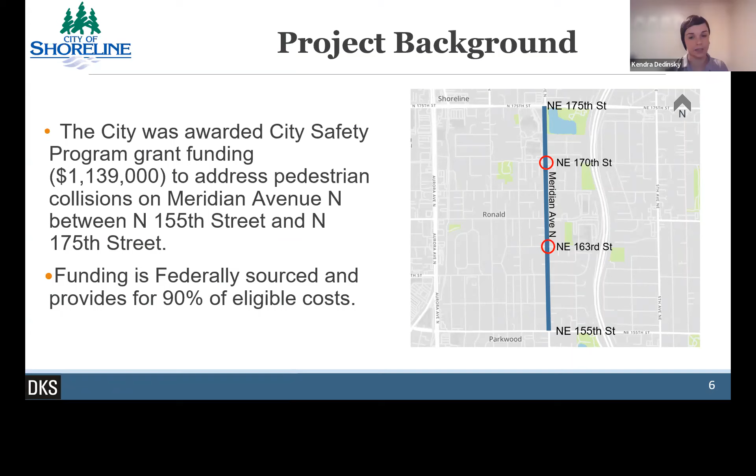All righty, thanks. The Washington City Safety Grant is the premise of this project, and it funds projects based on collision history and a city's proposal of using proven safety countermeasures to address collision history. There were pedestrian collisions in the time frame for this grant at 163rd and at 170th. So the city's grant proposal included a number of measures to improve pedestrian safety, including crossing improvements specifically at these

2 intersections. There's also been a bicycle collision in this segment of the corridor, and the corridor's long-term plan includes bike facilities, as well as a turn lane to address growing traffic volumes. As such, the project proposal also includes bike lanes and turn lanes at strategic locations for compatibility with long-range plans. Next slide.

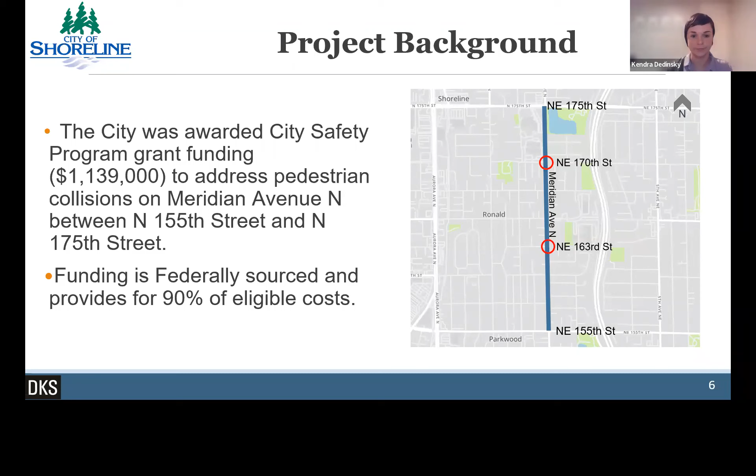As I just talked about on the last slide, based on collision history, the main goal of this grant is to improve safety, particularly for pedestrians. This will be done by improving crossings, including pedestrian-activated flashing beacons, curb bulb outs, which I'll talk about in a minute, so don't be confused by that term, but those reduce crossing distances, parking restrictions near intersections to improve sight lines, bike lanes, and strategic turn lanes, which can also help to reduce angle and rear-end collisions.

The project is not rebuilding sidewalks for the most part, with the exception of bringing curb ramps at the 2 crossing improvements up to ADA standards; ADA is accessibility for mobility impaired users. So the project will not be impacting trees or adding a bunch of new pavement necessarily, but will be better organizing movements for each mode of travel and reducing exposure for the most vulnerable roadway users.

It's important to understand that this is a grant project, and because of that, our scope and budget are generally limited to these improvements. We're not going to be able to really expand scope beyond what we're showing here today, nor can we really do work outside of the project boundaries. Next slide.

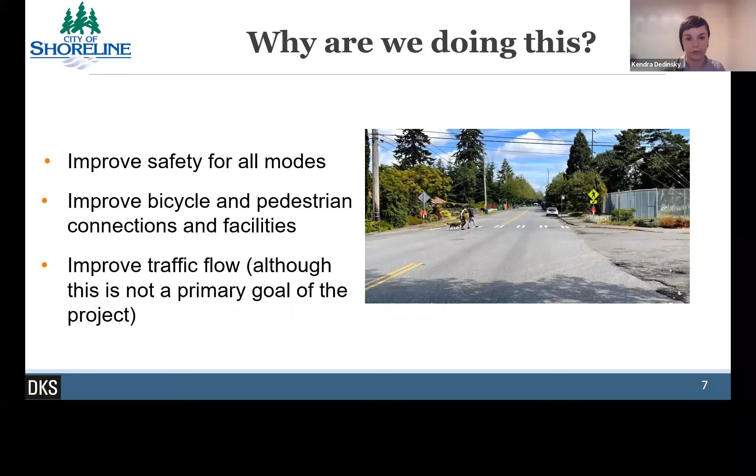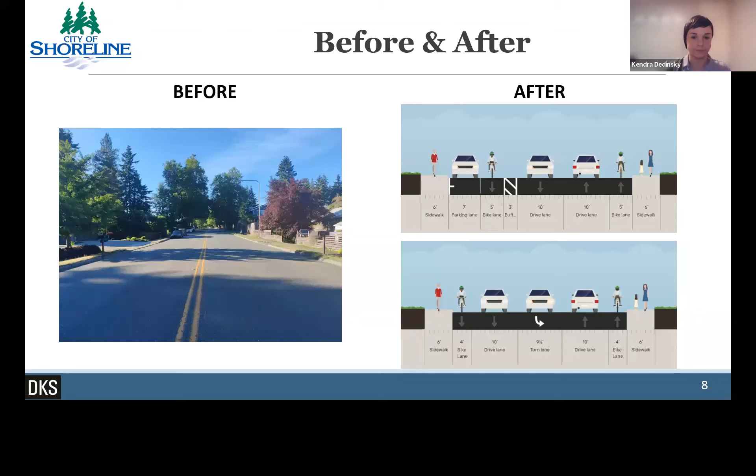Part of the public outreach process, which Veronica's going to talk about a little bit later, is really seeking your feedback on the application of these 2 cross sections and options as to what area they apply in. We specifically asked for feedback so far on the intersection of 167th, and so far we've heard a preference for the inclusion of turn lanes and removing the parking. But again, Veronica will talk a little bit more about how to provide feedback a bit later. Okay. Moving on to the next slide.

I do want to mention that we conducted a parking survey prior to the project development. And although some on-street parking certainly occurs throughout the corridor, it is generally not heavily utilized, and the proposed plan should work to accommodate the on-street parking demand today. Additionally, feedback so far has indicated an interest in some parking removal, given some challenges in terms of sightline concerns at the intersections and making turns to and from those side streets. And then generally speaking too, for the crossings, we want to maintain those sight distance lines to and from crossing pedestrians at intersections.

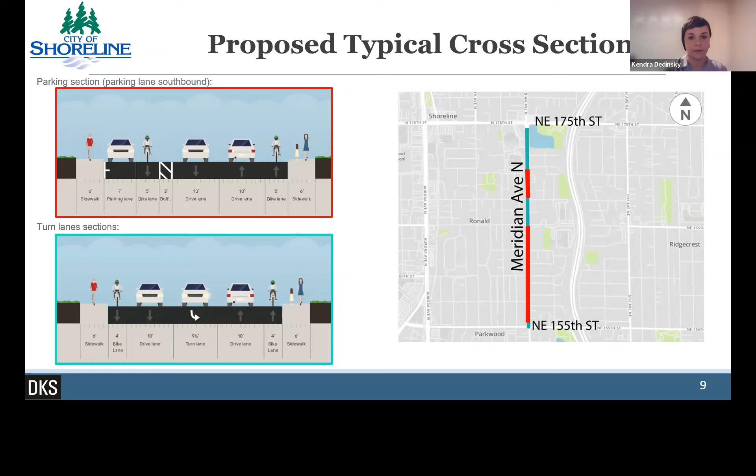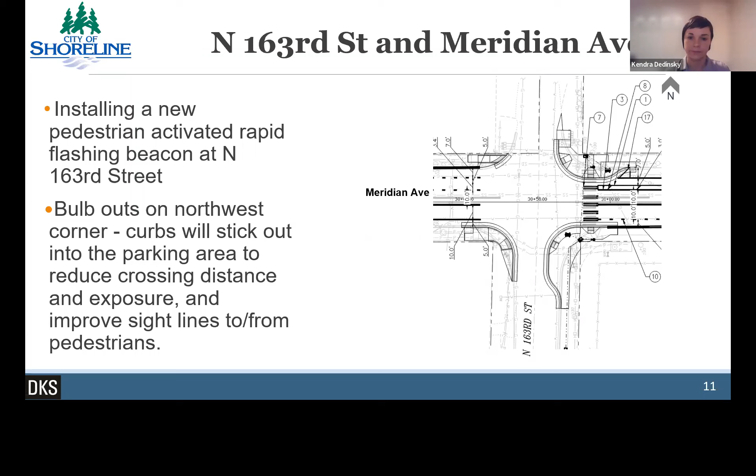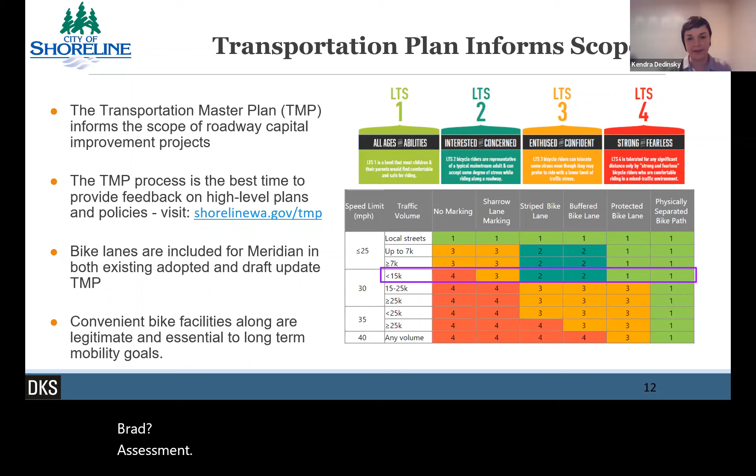But the transportation master plan really sets the overarching modal plans, which is to say the sidewalk plan, the bike plan, the vehicle plan, also transit and freight, which guides capital project design, scope, and investment for really the next 20 years or so. It also sets policies for how we prioritize various modal goals. So for example, our complete streets policy and other supportive policies within both the existing and adopted TMP and the draft version intend for bikes to be accommodated on most streets in some way.

So we often receive comments about how biking along arterials like Meridian is not safe or appropriate and should instead be accommodated on side streets. I want to just note that while it may be uncomfortable to bike on some arterials right now, our city's goal is really to make bicycling reasonably comfortable on almost every street citywide.

Arterials are the backbone of our transportation network, and it's where a lot of the action is, like bus stops, schools, parks, retail destinations, and all of those are places that cyclists are trying to get to and from too. So they really do form a convenient and important network for that access, rather than diverting those trips off corridor. So the draft criteria for how we are planning to approach this need for bicyclists to be comfortable on all roads is called bike level of traffic stress, and it's a notion that's being adopted by multiple cities, region-wide and really nationwide.

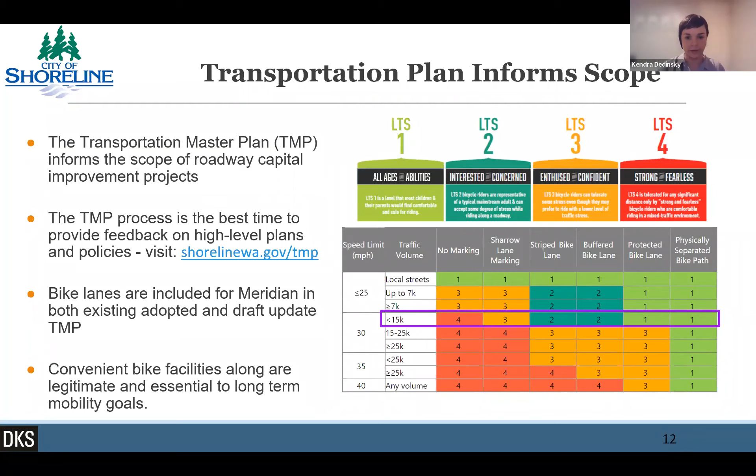Okay, this is the last slide of me rambling on, and then I'll pass it off to somebody else. But I just want to reiterate that this is a grant project. It's fairly confined in its scope. The grants for the Highway Safety Improvement Program, now coined City Safety Program, are relatively modest. Generally, grants in this $1 million range are typical, and anything beyond that tends to move into something that is not covered under this grant. So I'm just reiterating that we can't fund or address every concern, particularly not beyond the project's immediate boundaries.

And I also just want to make sure that everybody understands we're not trying to widen the pavement. The sidewalks are not changing significantly. And as such, there's really not a big impact to trees or other environmental concerns in that regard. We're really keeping this tightened to the roadway and focused on pedestrian, bicyclist, and really vehicle safety as well. With that, I'm going to hand it over. All right, thanks, Kendra.

So just a very high level schedule of where we're at. Currently, we just completed 60% design, so that's actually under review at the city right now. That's been under development this summer, and we'll be sending that back to the consultant to move on towards final completion. So if everything goes according to plan, this winter we would have a package ready for contractors to bid on, and next summer we could be actually building the project. So it's pretty exciting to move forward. It's been a pretty rapid project, but I think it'll be a good one. It's one that I'm excited about.

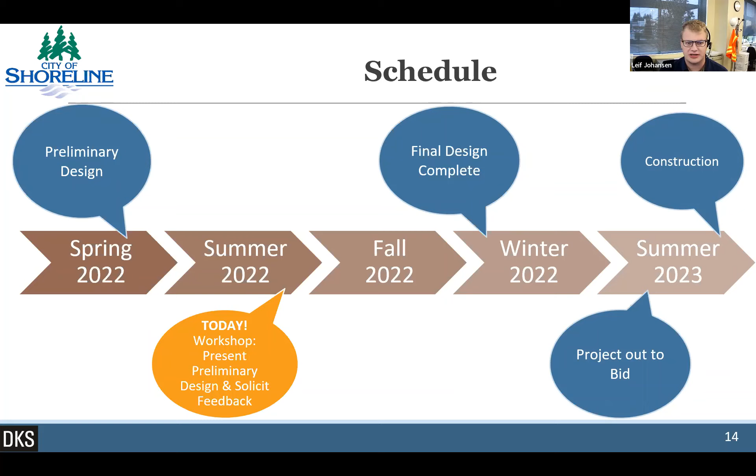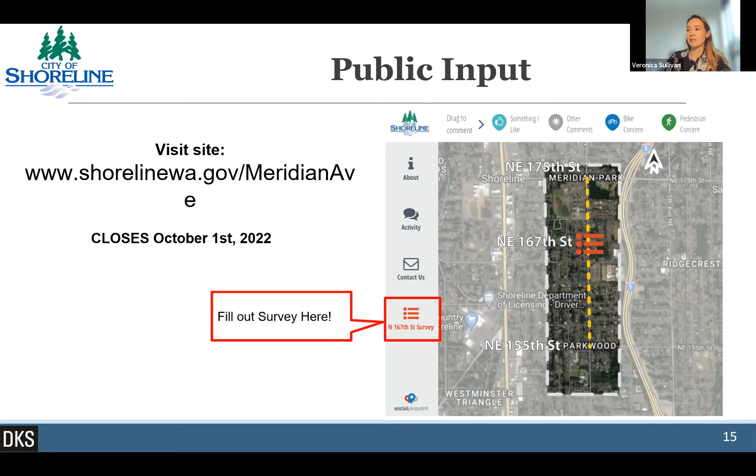All right, now I get the fun task to show you about the public input. So I'm going to put something in the chat box. It's called the Shoreline Meridian Ave project website. So if everybody wants to try and put that into their Chrome or internet, you'll see that in the Meridian Ave safety improvements, there's a link at the very top to Social

Pinpoint. The project overview shows an overview of what is going to be included; the project area is between 175th and 155th Street. You can see the background information, you can see the proposed schedule, hoping everything goes well and we don't hit another pandemic. But if everything goes well, hoping that next summer we'll have it constructed or begin constructing.

And at the very bottom here, there's community demographic information. This is an optional survey. We're just curious to know what language you're speaking, how you found out about this particular event, and an email address if you're interested in getting in touch with other projects as well.

But it just helps us understand who's actually attending the events, and you don't have to answer all of them. We just want to know how you found out about this particular event so that we can better promote and reach out to other areas and make sure that this project reaches everyone.

Okay. We also sent out postcards to a lot of the neighboring areas within the project boundaries. I'm not sure anyone received those postcards, but please let me know if you did receive them in your mailbox. And then, at the very top, what I really want to go over is the Social Pinpoint site. So if you click on this image here, it will direct you to a new website called Social Pinpoint.

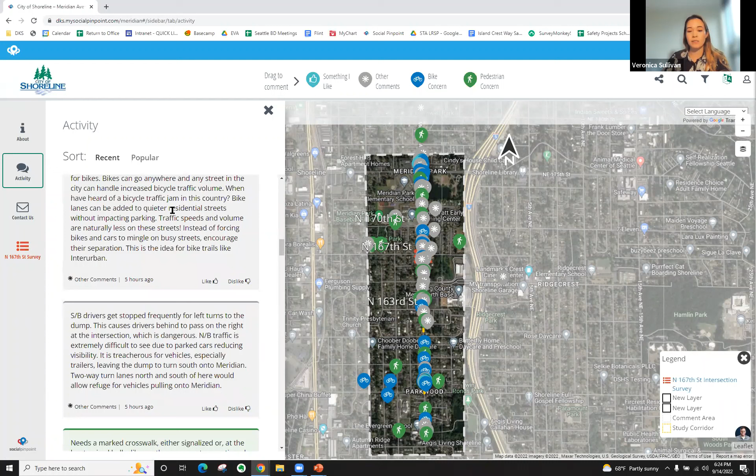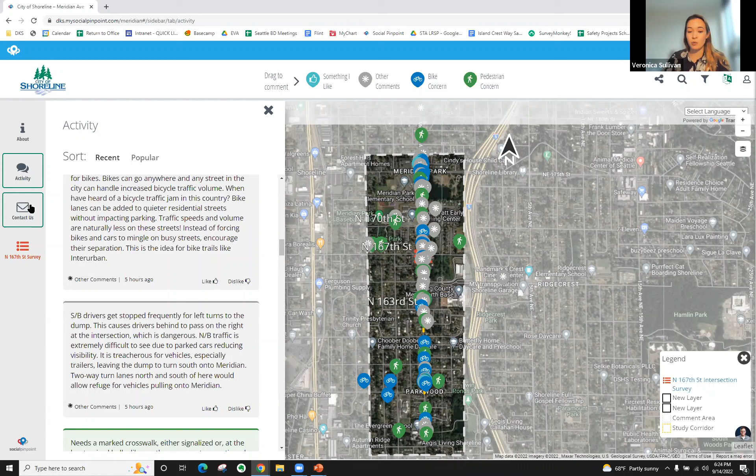We've used a lot of these for the interim design feedback, and it really helps us understand what people really care about and how we can improve our design. We just want to make sure we direct all the comments into here. So it's a great way for us to immediately direct your feedback into the design. And then there's also Contact Us. You can provide information to the project manager, Leif Johansen.

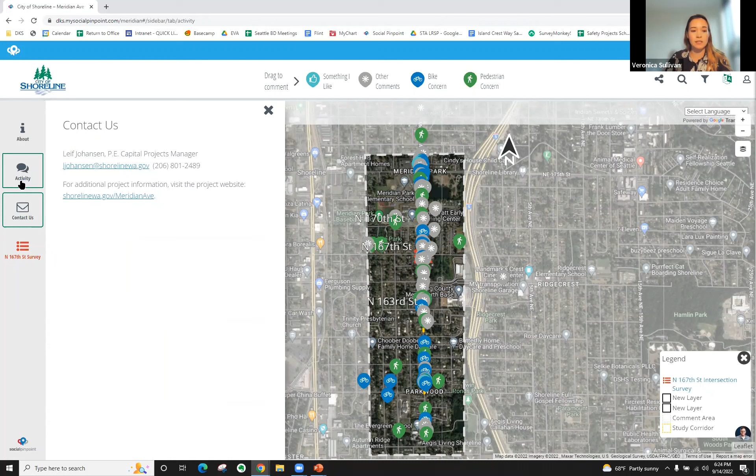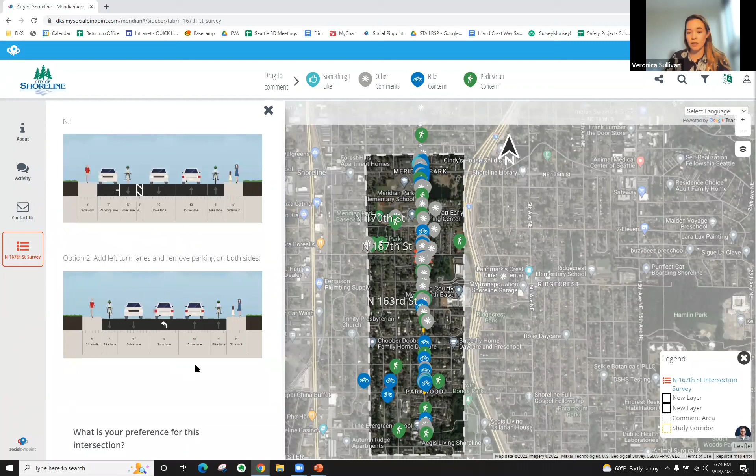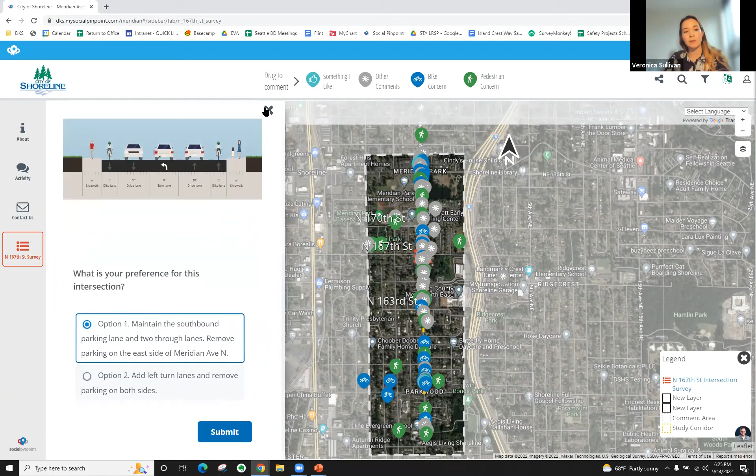And at the very bottom, you will see there's a survey for the 167th intersection. We would just like your feedback on what type of configuration you would like for this intersection. Would you like the parking, or would you prefer having a turn lane at this intersection while you're approaching it? Click on your preference, option 1 or option 2, and then click on submit. It would really help us understand where we should direct our design.

And to create a comment, this is really fun. You can drag any of these 4 icons. If you have a pedestrian concern, a bike concern, other comments, or something I like, you just click, hold, drag it onto the map, and a new window will pop up. You can say anything you'd like. I love this idea. I have a great idea. Whatever you'd like to say in the comments, you can. And these are optional. You can say your name, add your phone number, add your zip code, but we just need your email and your comment, and that's about it.

You can also attach photos, which is really, really helpful. If you're thinking, oh, we like this particular bike lane or this particular bike box, you can attach a photo, or this particular sidewalk needs to be updated or something like that. You can just attach a photo so that we know your concerns. And then you click on add comment and it will stick. There you go. Easy peasy.

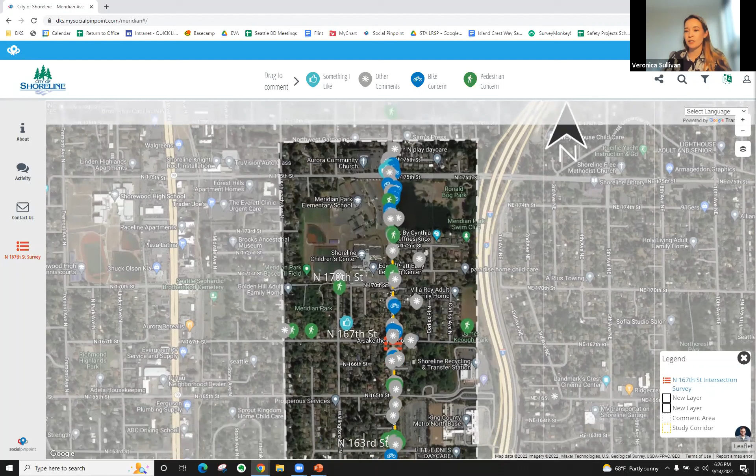All right, if you have any questions, we can go through it again, but let me know in the questions and comments. I would just like to let you know that this particular website will close on October 1st. So you do have a few weeks to add in your comments before we get to the next stage of design.

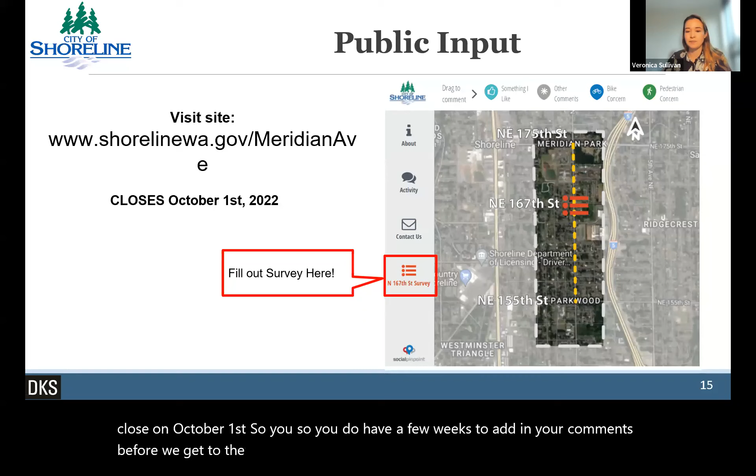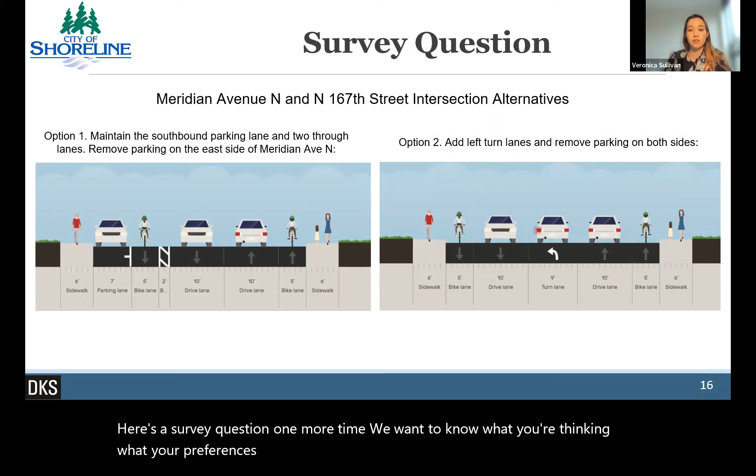Okay. Here's a survey question one more time. We want to know what you're thinking, what your preference is for the 167th intersection alternatives. The first option we went through before was maintain the southbound parking lane and 2 through lanes and remove the parking on the east side, Meridian Ave, or add 2 left turn lanes and add a left turn lane and remove parking on both sides.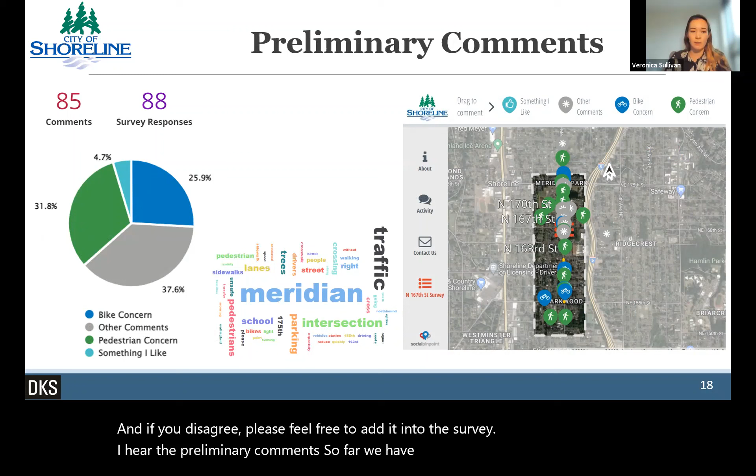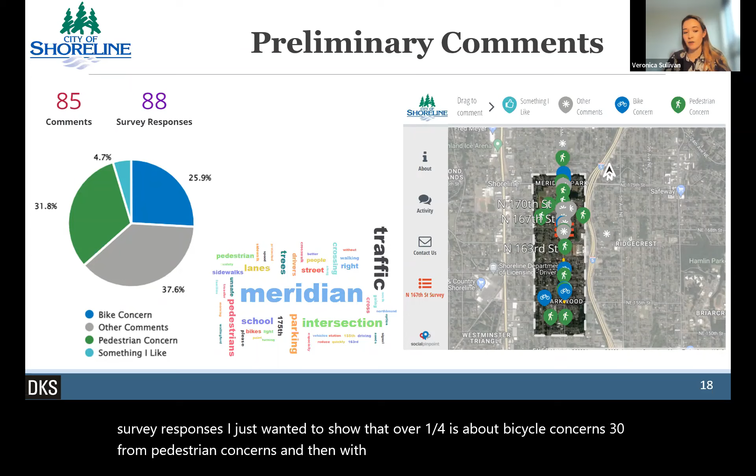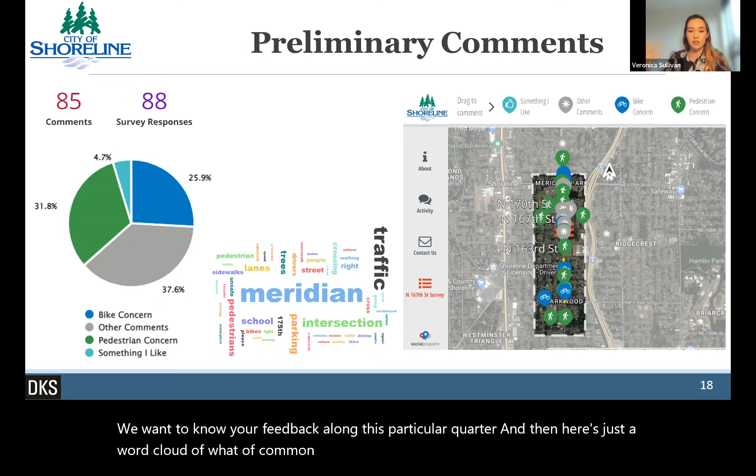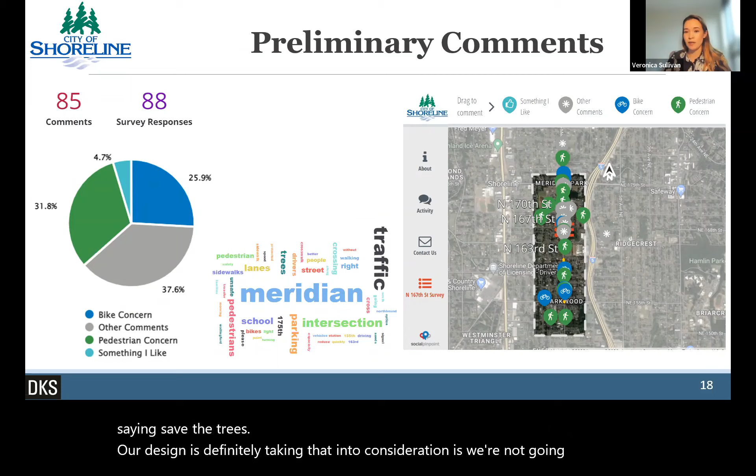I just wanted to show that over a quarter is about bicycle concerns, 30% from pedestrian concerns, and then we have 37% of other comments, which is really great. We want to know all your feedback along this particular corridor. And then here's just a word cloud of common themes: Meridian, traffic, intersection, school, trees, pedestrians. We definitely got a lot of comments saying save the trees, and our design is definitely taking that into consideration. We're not going to remove any trees, which is great. It's a beautiful, beautiful street. And that's about it. Okay.

So here we're going to have the questions and comments portion of the presentation. At first, I would like to introduce Sarah Keenan. She got her internet back, which is great. So Sarah, if you want to show your face, say hello to everybody. Go ahead. Yeah, thank you, Veronica. Sorry, as Veronica mentioned, I was having internet issues at the beginning of the presentation, but happy to be back on. Thanks so much, everyone, for joining. My name is Sarah Keenan. I'm the project manager on the consultant side, so I've been working very closely with Leif and Kendra and really overseeing the design portion of this. So I'm really happy we could share it with you tonight and really looking forward to hearing your feedback. Awesome. Thank you so much, Sarah.

So the first question we've received was from Hassan. I apologize if I pronounce your name wrong, but please feel free to click on that raise your hand. Hassan's question is, when will the design be finalized and will there be another meeting? Leif, do you want to respond to that question? Yeah, sure. So we currently don't have another meeting scheduled, but the design is scheduled to be finalized probably by the end of the year. We're really sprinting to the end because we need to hit the construction season as early as possible to get good bids. So I'll say this December we'll probably be buttoning up and finalizing the design.

Yeah, I can tackle that. So this will kind of be a rehash for some of the folks who were on before, but in general, this grant is fairly targeted to improving a couple of specific crossings where we saw injury collisions occur for pedestrians. And so what we're proposing, and perhaps it would make sense, Veronica, if you could scroll back to 163rd to that diagram, but you may be familiar with pedestrian activated flashing beacons.

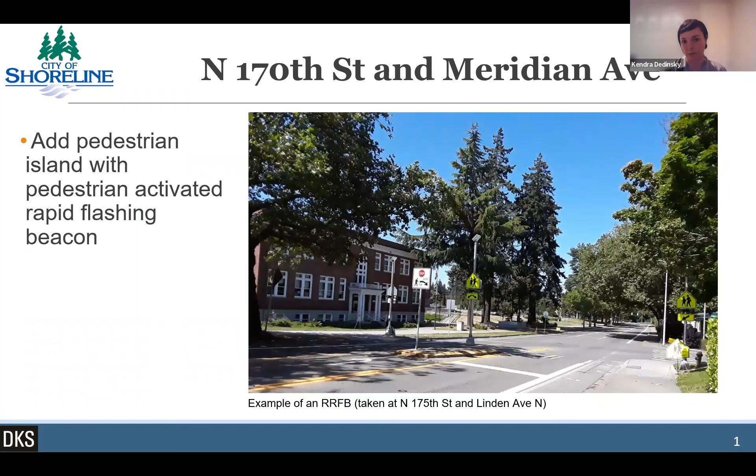So we are planning that for the intersection of 163rd and then further supplementing the intersection of 170th up by the Early Learning Center with a median refuge and flashing beacons. And so 163rd and 170th are the primary targets for the pedestrian improvements. And then you can go to 163rd there, Veronica. And you can see that we're also going to be modifying the curb lines a little bit at 163rd, pushing the curb line out in order to reduce the overall pedestrian crossing distance and exposure, and also improve sight lines.

The other thing that I mentioned, but didn't really talk about too much, was that the bike lanes can be helpful both to act as a buffer from the active vehicle space, as well as creating a little bit more sight distance. In practice, what drivers will do as they approach from a side street is stop at the stop line and then creep out to a point in which they can see. And so that bike lane space, when it's unoccupied, provides better sight lines to turn the corner and not conflict with a pedestrian.

And it also provides that buffer space for pedestrians from the active traffic on Meridian. Bike lanes, as well as lane width as a whole, can help to slow drivers down too. Just the presence of bicyclists on the roadway can have that effect. What else did I miss? Let me think.

Thank you, I appreciate that. Has there been any discussion about reducing the 35-mile-per-hour speed limit to 30 miles per hour for increased safety for pedestrians? We did. It's already 30. We just did that in June. I saw that it was on for all of Meridian Ave. Oh, awesome. Okay, maybe the signs haven't changed by our neighborhoods. Oh, they should have. If they haven't, let me know where, because it definitely did go into effect on June 1st for the entire corridor.

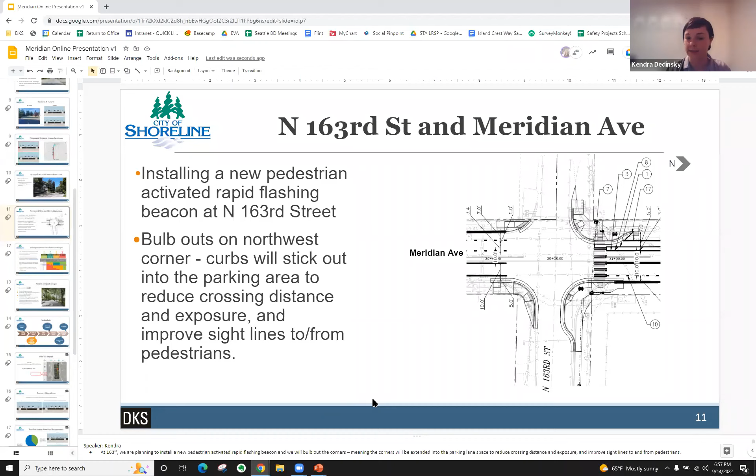In terms of the side streets, that's another question. I think that becomes a tricky one as well. Especially at intersections like this, it becomes difficult to create a raised crossing at an uncontrolled intersection, if you will. So at an intersection like 163rd, if we were to keep the 163rd leg raised, that creates a slowdown for the folks that are making a southbound left turn, for example, to 163rd. And we don't want to put them in a vulnerable position of being stopped or slowed while they're making that turn in front of active traffic.

So usually, if you're going to use a raised crosswalk in an intersection scenario, it would be under a controlled, maybe all-way stop, or potentially some kind of beacon or signalized situation where everybody's yielding at some point, as opposed to this more uncontrolled movement. So for various reasons, it didn't make sense for this project, but it is something we are starting to do and hope to do a little bit more of in applications where it makes sense. The next place we'll be doing a raised crossing is on 20th Avenue Northwest near Richmond Beach Saltwater Park. So you can look out for one there.

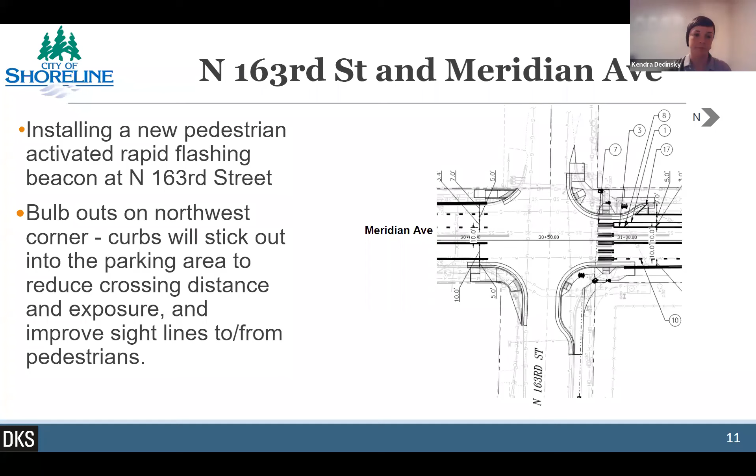Great, thank you so much for your comment. All right, we have another comment. I might have missed this, but will the bike lanes be protected? And will the bike lanes have sensors for the traffic lights at intersections? Thank you.

And I can handle this one, Sarah, or you can. Southbound, we are planning for a buffered bike lane for now. So it's a striped bike lane with a striped buffer, meaning just an additional, I think is it 3 feet, Sarah? That provides just a little bit of extra width for the bicyclist and a little bit more visual delineation between those two modes.

We have not so far as a city opted very often to use things like delineator posts, which you may see a lot of in Seattle. They're a very high maintenance burden, and we just haven't found a strong correlation between their ability to prevent collisions. But in the future, particularly if there are large scale capital projects or redevelopment projects that occur, there's potentially some opportunity there to strengthen that buffer. But right now it's just a striped buffer in the southbound direction. In the northbound direction, it will be just a striped bike lane for now, is what we're planning for.

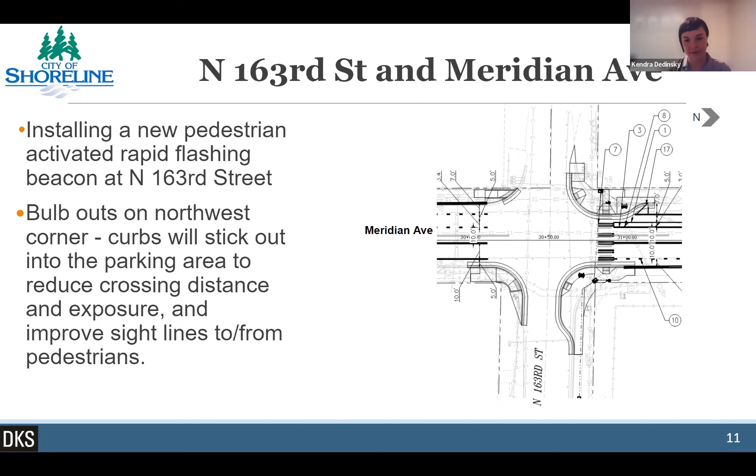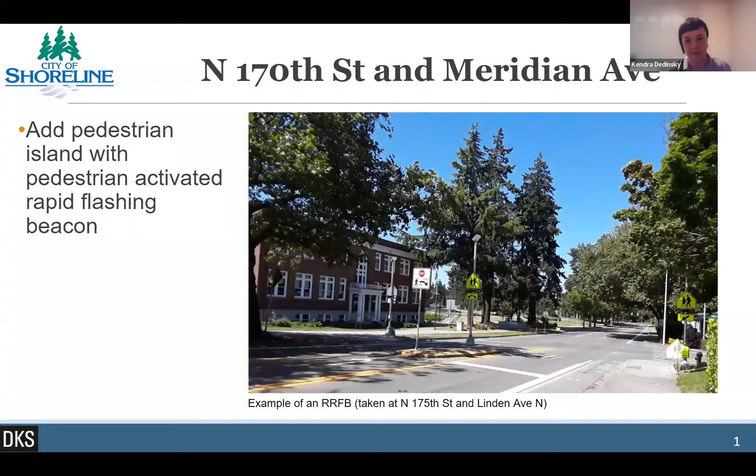Great. All right. The next, I'm going to go back up. Oh, the detection. I didn't answer the detection. Oh, yes. Go ahead. Sorry. So at 175th and Meridian, I would encourage you to check out our project website that Leif, again, is project managing. At that intersection, we have plans for, if you're familiar with the terminology, a protected intersection for bicyclists. Essentially we're funneling bicyclists and pedestrians into a large waiting area to utilize pedestrian push buttons, which functions quite well in terms of actually being consistent at serving those movements. And it is more protected for an all ages and abilities function, which is especially important given the school there and given 175th's important centralized location in our city.

To the south at 155th, we do have some video detection. I understand it is not perfect, but we certainly think bicycle detection is an important component of a functional bike facility, and it's also a law. If there's a specific movement that you have an interest in seeing detection increased or improved or just included, please do let me know, and we will look at that as early as next week. There are things we can do with the detection there to help those bicycle movements if they're not being served. This would be the first I've heard of it at 155th and Meridian being an issue. So please do contact us and let us know. Thank you. Great. Thank you very much for your comment.

All right, we got another one from Dennis Lynn. During heavy traffic, folks create their own right-hand turn lane from 170th to 175th northbound. Anything being done to curb this? So we're talking about the early learning center, and I think what I'm hearing is on 170th, heading eastbound, presumably, to Meridian, a sort of pseudo right turn lane is created. Is that what I'm hearing?

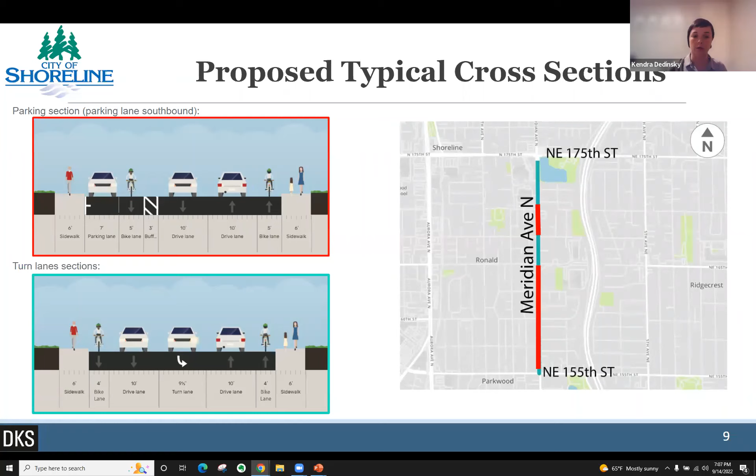I also wanted to address, there was a question: will you also add bike lanes on Meridian south of 155th and north of 175th? Without continuous bike lanes, cyclists will be less likely to bike on Meridian. And the answer to that is yes. Our bike plan does plan for bike lanes or bike facilities along Meridian for the entire duration of the corridor. So that means from 145th all the way up to 205th. The timing for those is to some degree unknown.

I think as you head south along the corridor, it's likely some of the redevelopment activity might contribute to some of that bike lane construction or provision. And then similarly, as you head north along the corridor, that is the case as well. We do have some prospective grants that would fill in between basically where the 175th Meridian project leaves off and up to essentially the Interurban Trail connection up at 200th. So that is on the horizon, and if we're lucky, we might be able to accomplish that over the next 4 years or so.

Great, awesome. Are there any other questions? Anyone want to raise their hand? I think we've addressed all of them so far in the comment box. If not, please raise your hand.

There was also one that I typed the response to, so I just want to make sure that got addressed. There's a question about sightlines on 165th, especially when turning out of the transfer station and making a left. Right now the plan shows removal of parking on that northbound side, so that's going to significantly improve sight distance at that intersection. Great, thank you.